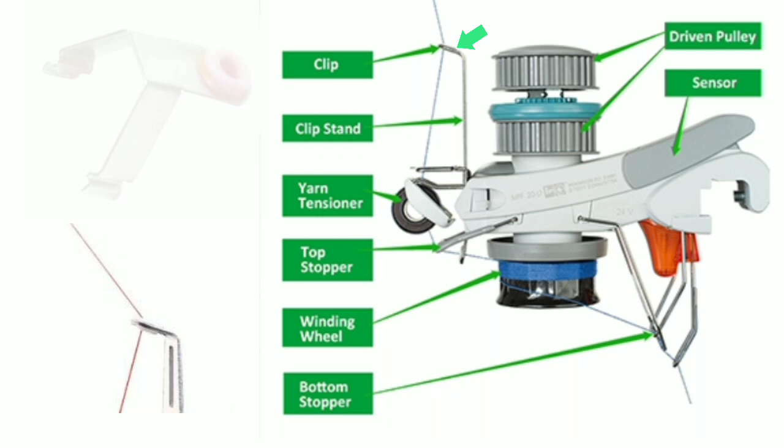Feeder clip maintains constant tension on the yarn. Clip stand provides support to the clip and yarn. Yarn tensioner provides uniform tension to the yarn.

If the yarn breaks, the top and bottom stopper moves up and the sensor receives a signal to stop the machine. Winding wheel provides uniform yarn tension.

Driven pulley translates the input power into the required motion, speed, and force for the feeder to operate as intended.

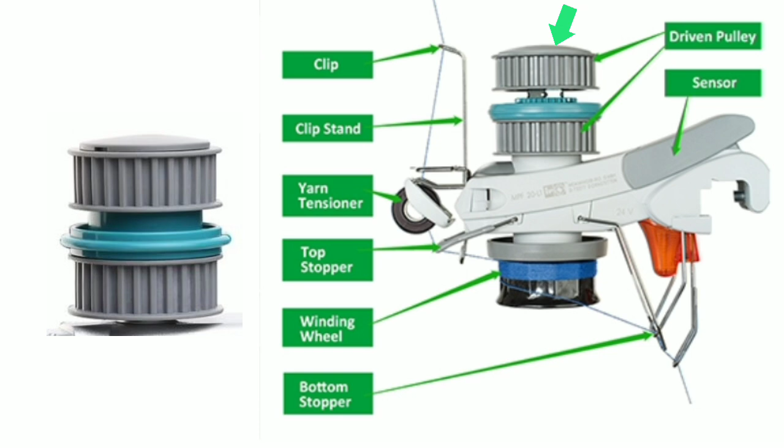Aluminum telescopic tube maintains a smooth and consistent path for the yarn to ensure proper tension and feeding to the machine's positive yarn feeder. Creel is where yarn packages are placed.

Creel holder holds the creel and yarn package.

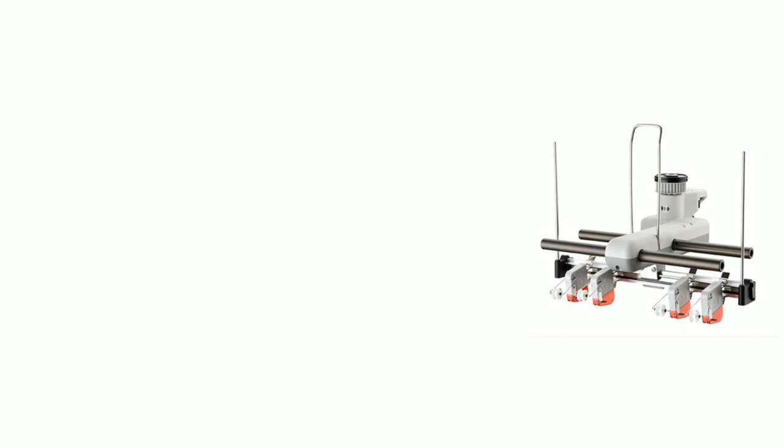Lycra feeder device controls the tension of the lycra yarn, ensuring it is delivered to the needles with the correct and stable tension to provide stretch and recovery to the finished fabric.

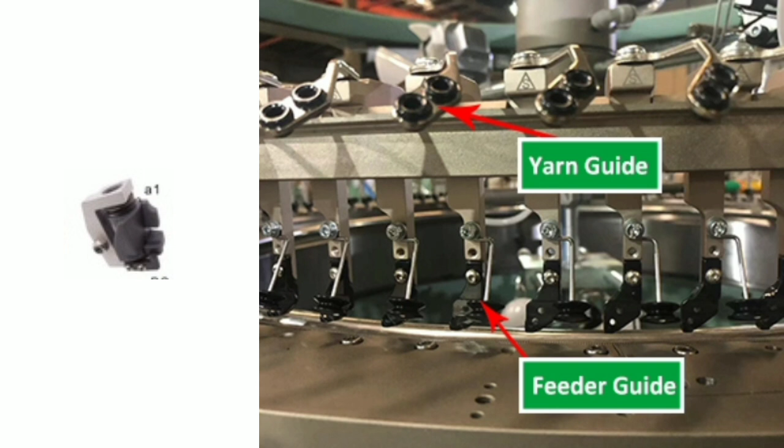Yarn guide guides the yarn to the feeder. Feeder guide directs the yarn from the yarn feeding mechanism to the knitting needles. Feeder ring holds all the feeders tightly.

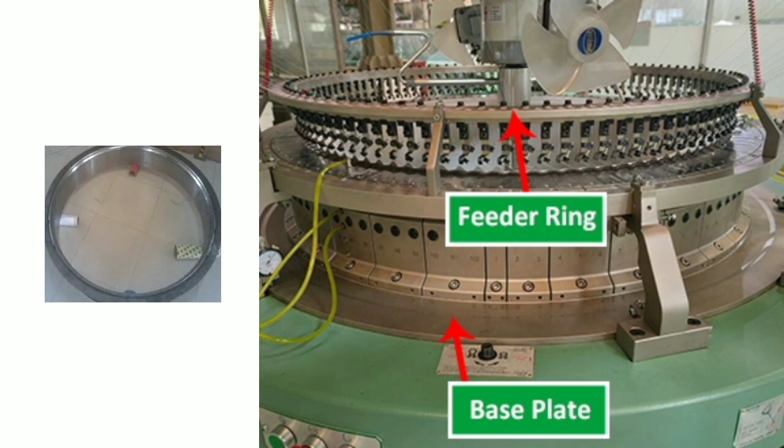Base plate holds the needle, cam, sinker, and cylinder to its groove tightly. Knitting needles help the yarn to create a loop.

VDQ pulley adjusts the fabric's quality, GSM, by changing the yarn feed and stitch length. Pulley belt drives the VDQ pulley.

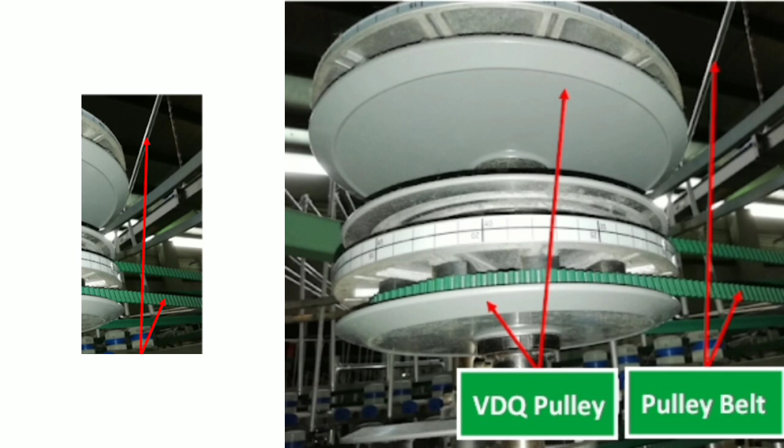Knit cams form a standard knit stitch. Tuck cams create a tuck stitch by holding an old loop while forming a new one, and miss cams cause a miss stitch by having a needle skip forming a new loop altogether.

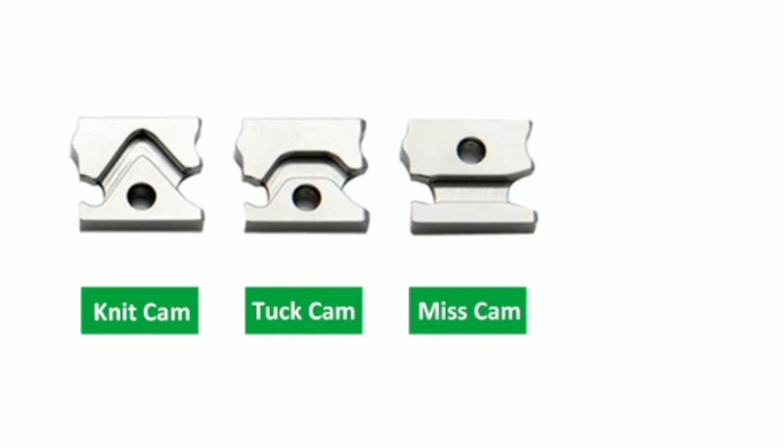Cam box holds the cams, which in turn guide the reciprocating motion of the knitting needles.

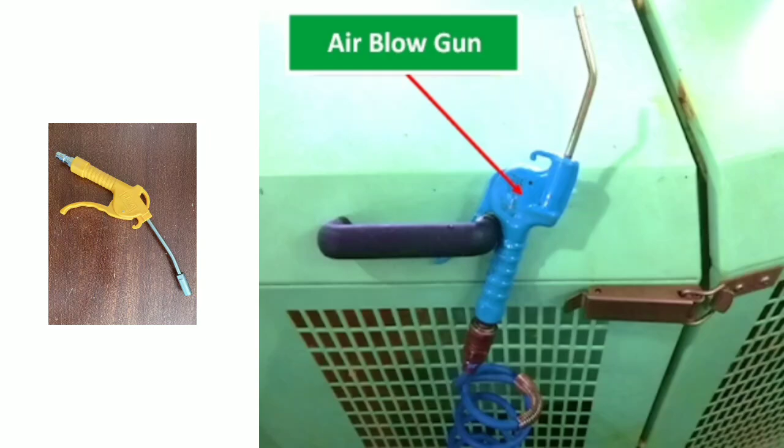Air blowgun functions to remove lint and dust, and assists in guiding the yarn during machine operation.

Needle detector monitors for broken, bent, or misplaced needles to prevent defects and damage. Fabric detector identifies defects in the knitted fabric.

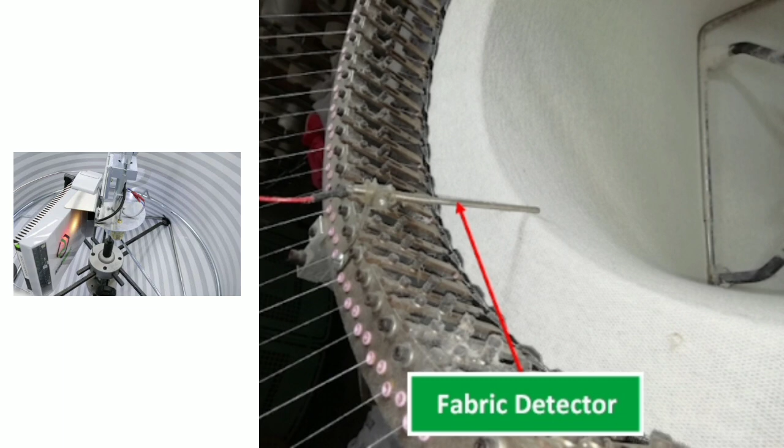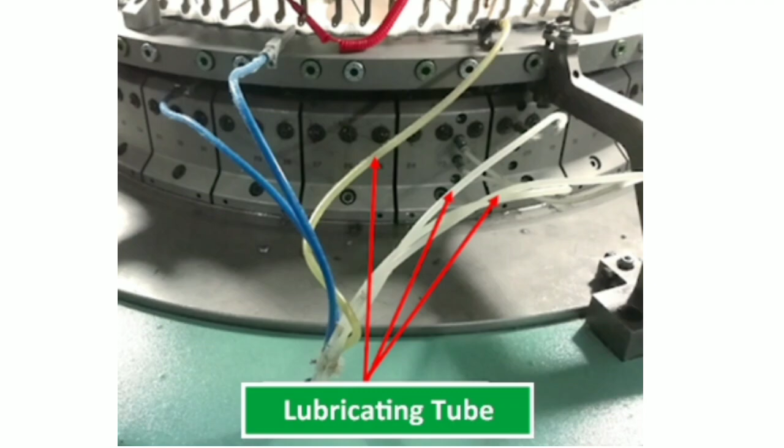Lubricating tube supplies oil to the moving parts to reduce friction, wear, and heat generation. Machine body provides support to all other machine parts.

Manual jig is used for the manual adjustment and maintenance of the knitting elements, specifically the needles and sinkers.

Gate gives support for the cleanliness and security of the knitted fabric.